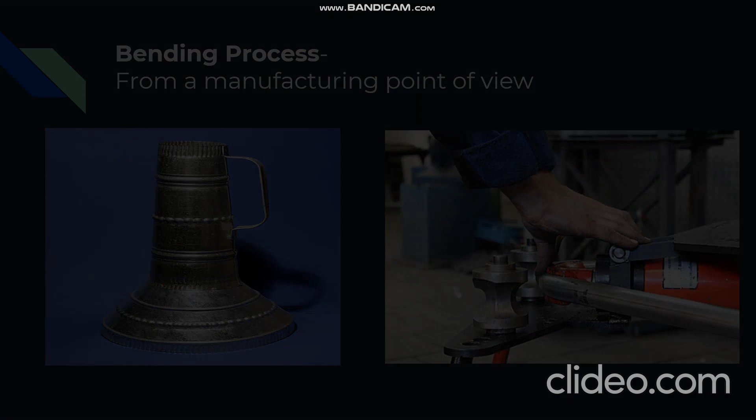I will not indulge in the theoretical aspect of this particular process because, as we all know, it is quite cumbersome. But I would rather like to point out the facts which distinguish this particular process in terms of its advantages from the other ones. It is a cost-effective and near net shape process when used for low to medium quantities. Parts are usually lightweight and have good mechanical properties. But there are some disadvantages too. There are some process variants which are sensitive to variation in material properties. For instance, in spring back, we have a direct influence on the resulting bend angle.

As far as the future improvements and implications go, there are various applications which are futuristic in their scope. Like earlier, we used to use press brake in various operations, but now you have robotic cells, which automate the process by using various machine learning algorithms. And to study the combined plate processes in sheet metal better, we can now use finite element modeling and statistical analysis. So this is a never-ending topic, and it is quite interesting.

And as we all know, the future is going to be automated any day now. So the sooner we learn to automate our processes from an ergonomical and economical point of view, the better we can customize our needs according to our particular processes. Now I would like to request my teammate to continue.

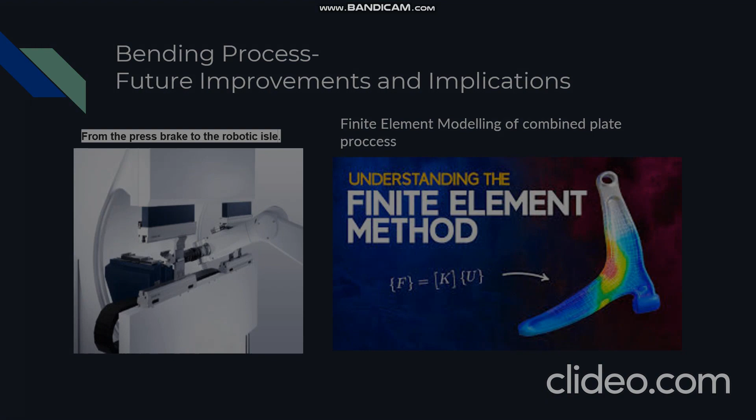Thank you, Vishwajit. I am Siddharth Kumar Swami from Team Rolling. Rolling process is a metalworking operation in which metal strips pass through a set of rollers to reduce sheet thickness and achieve uniform thickness throughout the sheet. The sheet is deformed along the line axis. Cold rolling process passes through rollers at temperatures below its recrystallization temperature. Due to absence of any high working temperature, the surface finish of the rolled product is good. Also, the reduction in size per pass is very less. The cold rolling process also improves the machinability of the metal.

Hot rolling is a metalworking process in which metal is heated above the recrystallization temperature to plastically deform it in the rolling operation. Hot rolling can significantly reduce cost because the hot deformation resistance of metal is lower than in cold rolling, which can significantly reduce energy consumption during rolling. The hot rolling process can improve the performance of metals and alloys because hot rolling can break coarse grains, heal microcracks, and reduce or eliminate casting defects, converting low ductility cast structure into high plasticity structure. Next slide, please.

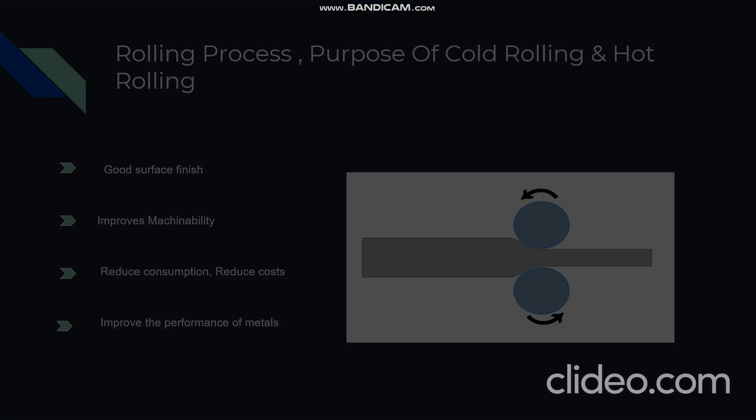Waviness. This defect occurs due to the improper load distribution on the surface of the sheet. When one area of the sheet is in compression, the other area will be under tension at that point in time. Edge cracks. This is a very common defect in rolling, hot rolling. When the hot metal sheet starts getting cold, it passes under the quenching medium. Alligator crack. Alligator cracks are due to the non-homogeneous flow of metal along the thickness of the sheet.

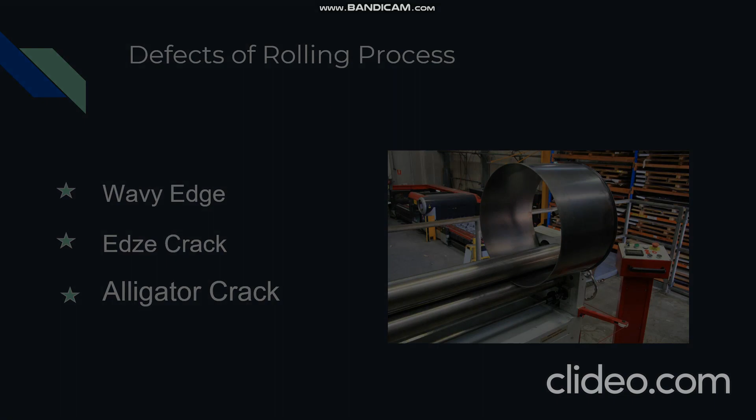Okay, thank you, Siddharth. So next, what is the purpose of forging? We all know what forging is and what the parts are, but what is the purpose of forging? Today I am going to explain it to you all. The purpose of forging is to create metal parts. Simple. Compared to other manufacturing methods, metal forging produces some of the sturdiest manufactured parts available in the market.

As metal is heated and pressed, minor cracks are sealed, making any empty spaces in the metal close. The hot forging process also breaks up impurities in the metal and redistributes such metal across the metalwork. This vastly reduces the inclusions in the forged part. Inclusions are compound materials implanted inside steel throughout manufacturing that cause stress points in the final forged parts.

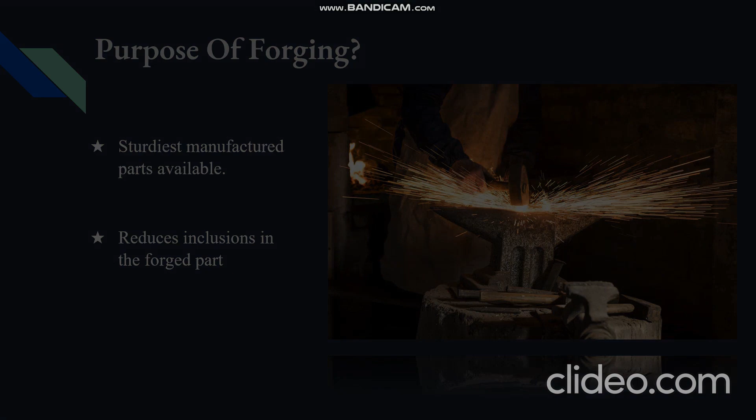So next slide. While impurities should be managed during the initial casting process, forging further refines the metal. Another way that forging strengthens metal is by altering its grain structure, which is the metal material's grain flow as it's deformed. Through forging, a favorable grain structure can be created and attained, making the forged metal sturdier.

The forging process is highly multi-purpose and can be used on small parts just a few inches in size to large components weighing up to 500,000 lbs. It is used to produce critical aircraft parts and transport equipment. Forging is also used to fortify hand tools such as chisels, rivets, screws, and bolts, and many more.

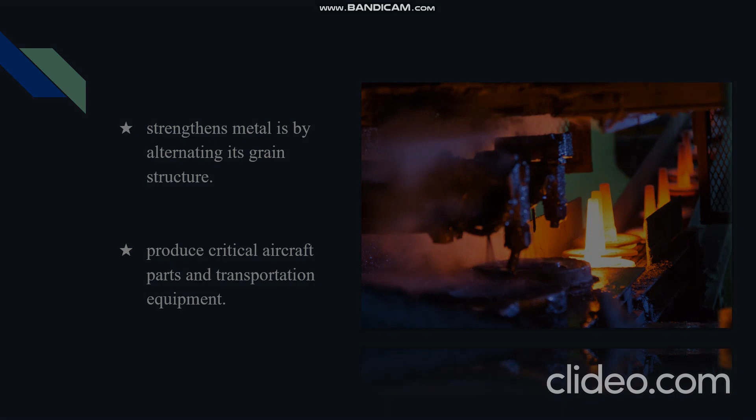So let's come to know some of the amazing facts about forging. Hammers with a driving force up to 50,000 pounds pound the metal into shape with controlled high pressure impact blows. Next are the presses. Presses with a driving force of up to 50,000 tons squeeze the metal into shape vertically with controlled high pressure.

And the next one are the upsetters. What are these? They are basically forging presses used horizontally for the forging process known as upsetting. Another one, a ring roller turns a hollow round piece of metal under extreme pressure against a rotating roll. So this is an example, thereby squeezing out a seamless ring with no welding required.

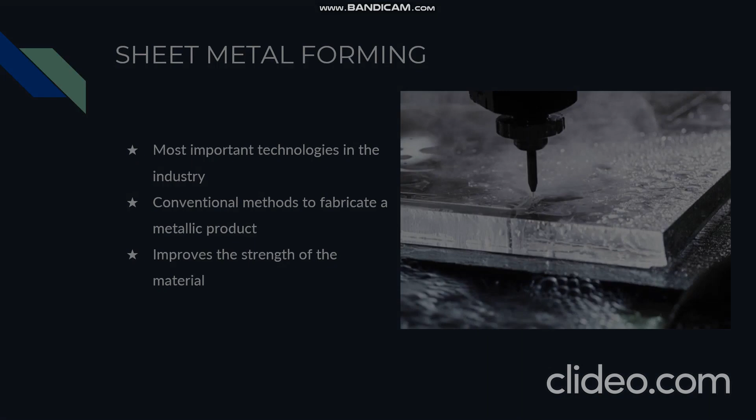Things you should know about sheet metal forming. Sheet metal forming and working are amongst the most widely employed processes in manufacturing. Unlike the many mechanical forming processes where the ratio of volume to surface area is large, automotive bodies, aircraft frames, major home appliance housings, and building fixtures are some of the arenas where large area sheet products are used. But there are countless applications for smaller sheet metal parts, for example, washers, beer cans, kitchenware, and utensils.

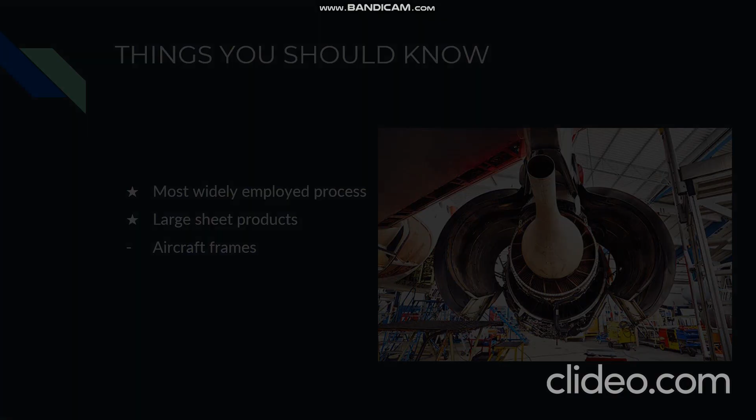I am going to explain the drawing process. First of all, the requirements of the drawing process. The physical property of the metal with the ability to be hammered thin or stretched into wire without breaking. This is the ductile property of the metal. Second, the rod or wire should be properly cleaned so it is dust and scale free before drawing. It should be lubricated to reduce friction associated with the operation. Next slide, please.

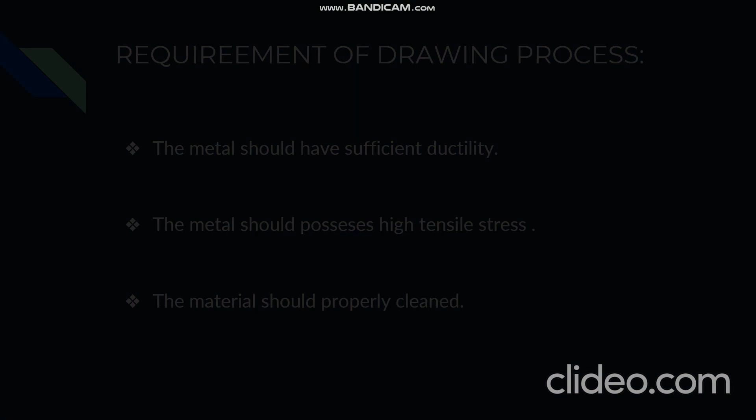Basically, the drawing process is divided into three sub-processes, that is wire drawing, rod drawing, and tube drawing. First of all, wire drawing. It is an operation to produce wire of various sizes within certain specific tolerances. Its maximum reduction in area of a wire is less than 45% in one pass.

Second is rod drawing. It is similar to wire drawing, except it is rigid and has a large diameter compared to wire drawing. Last part is tube drawing. It is also similar to the other two processes, except it uses a mandrel to reduce wall thickness and cross-section diameter of a tube. Next part will be explained by my teammates.

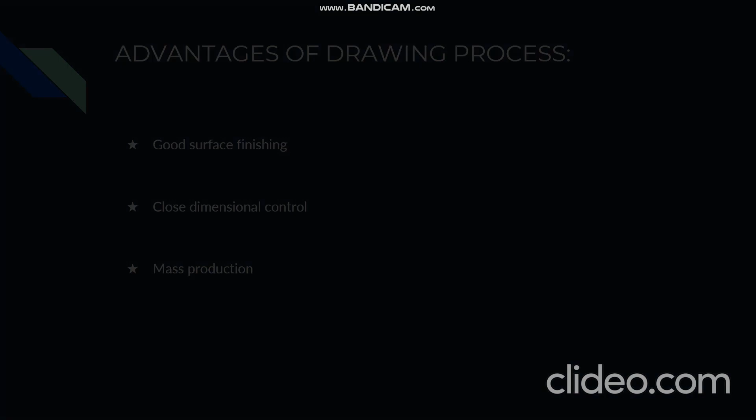The rigid tool consists of a punch, die, and a binder. In deep drawing, the plate holder closes after the metal sheet blank has been inserted. Next, the sheet is clamped between the die and the binder. This process slows down the flow of the sheet while it is drawn, thereby preventing wrinkles from forming under the binder. The punch stretches the sheet over the die radius and forms it in the die, and the amount of punch force necessary for forming is thereby continually increasing up to the lower dead center of the punch.

The effect of the process parameters, defects formed in the drawing process, and the evaluation of the formability of the traditional deep drawing process are introduced in detail. Some of the specific deep drawing processes, such as hydromechanical deep drawing with rubber tool, and other tools aided by active media, temperature and assisted drawing. Next slide.

The typical components include beverage cans, car engine oil pans, and rocket tank domes manufactured by deep drawing of sheet metal. The detailed applications of the process are: the deep drawing metal stamping professionals at Prosperate Machine are trained to meet our aerospace customers' exact standards and stringent inspection parameters, and we are known for reliable delivery at the quality standard time and again.

Deep drawing delivers a time-saving, cost-effective method for producing a variety of automobile parts in many sizes and complexities. Throughout our automotive metal stamping process, we are able to span a wide range of applications inside and outside of automobile vehicles. These deep drawn parts are also required in medical stamping, which are used in surgical tools, drug delivery devices, and other health care products. And there are many more applications. With this, we remain. Hope you understand all the processes explained. Thank you.

Yes, so finally, here is the end. So the main motive: what are the drawbacks, means what are the problems we faced during this inter-team grouping, and what knowledge we shared among us. So let me tell you. The first one, drawbacks. Generally, we faced the problem of decision making, since we are all from different groups having different types of knowledge. Someone wants to present theirs, someone else wants to present theirs. So we needed to discuss a lot regarding how to combine all of our knowledge in one presentation only. That decision making and decision clashing is the main drawback of our group.